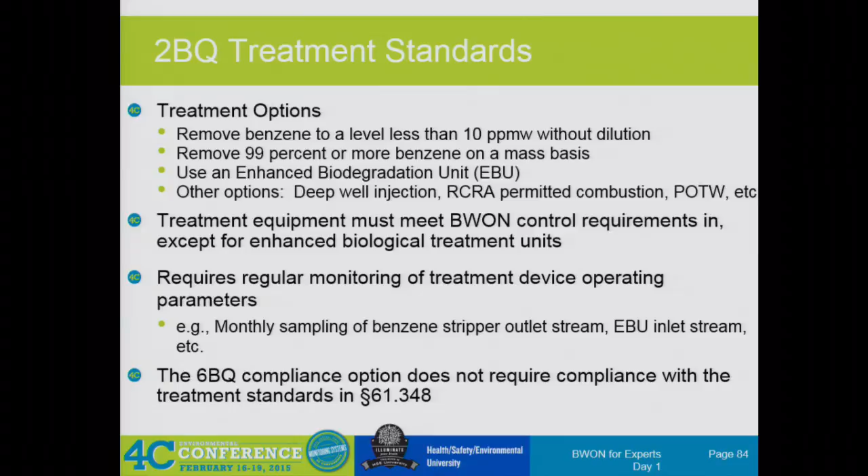And the 6BQ does not require compliance with treatment standards. The only place where 6BQ facilities point back to treatment standards is their first uncontrolled waste management unit, which is the place you count for your BQ. If your first uncontrolled waste management unit is an EBU and the concentration entering that EBU is less than 10, then you don't even have to count that stream. So that's the only time that 6BQ facilities reference back.

No, it's actually right here. Activated sludge. So what is an EBU? So it's an activated sludge process. Uses a suspended growth process that generates biomass, uses actually recycled biomass, and periodically removes the biomass from the process. So that's the definition in the rule.

If the inlet stream, and this is for both 2BQ and 6BQ, if the inlet stream to the EBU is less than 10 ppm, then it's an allowable treatment process for 2BQ facilities. And again, as a 6BQ facility, if it's your first uncontrolled waste management unit and you're less than 10 ppm, then you don't have to count that either.

So the rule has typical operating parameters listed. That's your food to microorganism ratio, MLSS, and residence time. This is what your bio units basically have to be designed to meet in order for it to be an EBU under BWON. Now, do you have to monitor these parameters on a regular basis? Anyone? No. There is no requirement in the rule to actually monitor, but if you have documentation that your system is designed to meet these, it's fine.

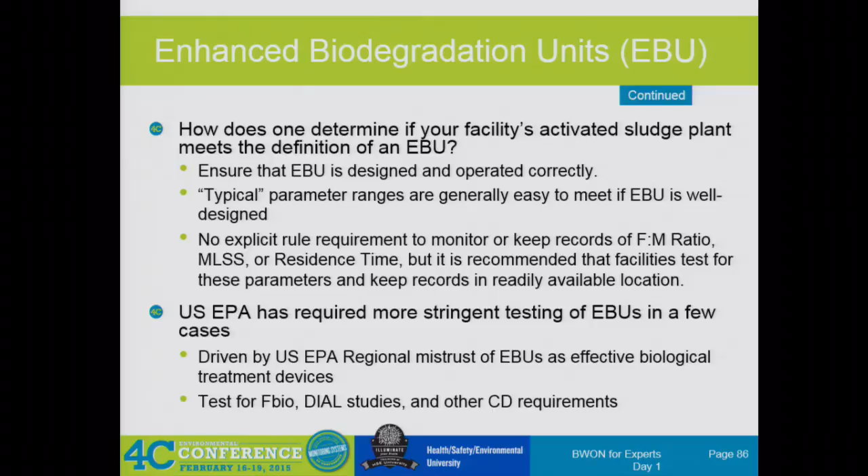Ooh, that's really up there. So treatment standards in the 6BQ. So it doesn't require compliance with 348. There's no reference to 348 under 342E. So given that this is kind of the path for 6BQ facilities back to treatment standards under the EBU. So 342E presents the 6BQ as an alternative to C. And C does not apply to wastewater streams at 6BQ facilities. So therefore, it doesn't go back to 348. It's kind of a big circle. I've had to do this several times to prove to people.

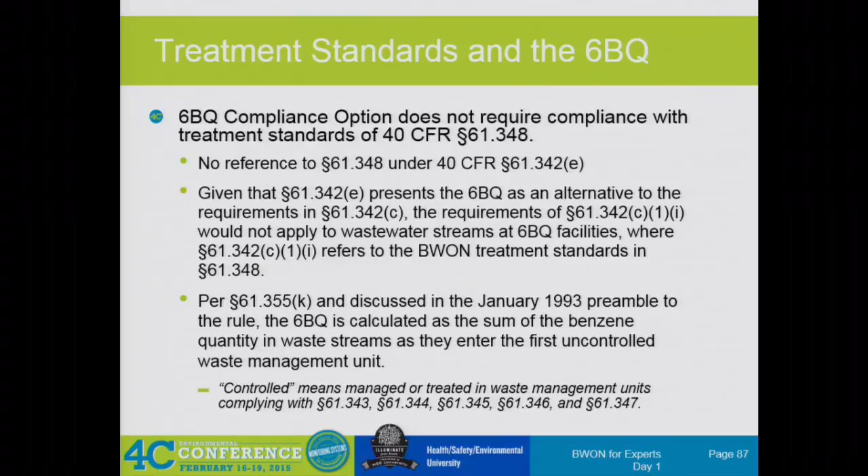So per 355K, and it's also in the preamble as well, the 6BQ is calculated as the sum of benzene quantity in waste streams as they enter the first uncontrolled waste management unit. And again, if that first uncontrolled waste management unit is an EBU and it's less than 10, then that stream does not even have to count toward your uncontrolled 6BQ.

So the other treatment options that were mentioned in that one bullet, so the deep well injection, as long as it is permitted under 270 and complies with 122 under 40 CFR. The use of the hazardous waste incinerators, again, they have to meet the requirements listed. And then industrial furnace boiler, we see a lot of these things used as well, injection of the waste stream.

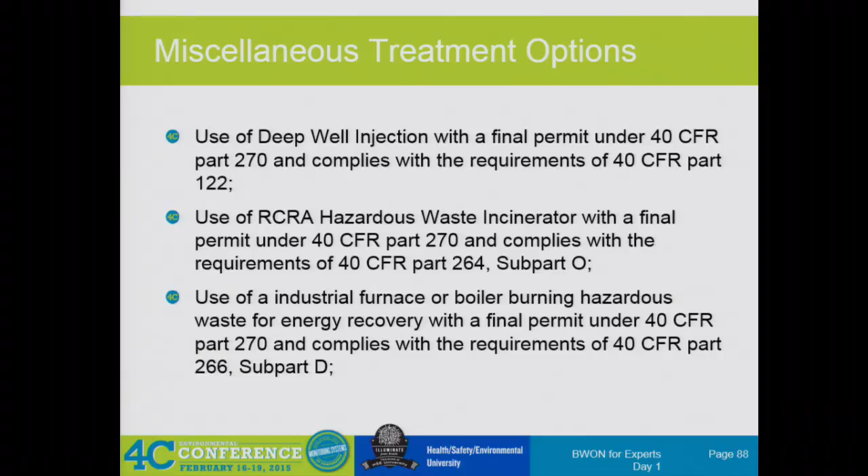The waste stream is treated in accordance with the land disposal restriction under 40 CFR 268, and it's designed and operated with a closed vent system to a control device, meeting 349 in the BWON rule. Or it can be treated by means or to a level that meets benzene-specific effluent limitations under the performance standards under 40 CFR parts 401 through 464.

So a lot of this, you don't see a whole lot. I've seen two deep well locations in my time with Sage. I think they don't have near as much to monitor and look after outside of their deep well requirements under their permit.

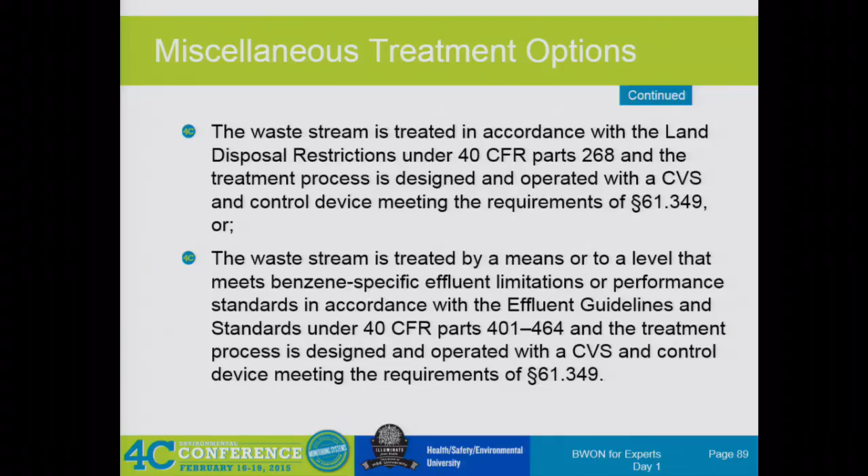So now that you've learned a little bit about treatment standards, what would your 2BQ be? Because the benzene stripper is a treatment device. I'm going to write the answer to the first one up here, the first one that we did earlier, because I like to do the comparison. Not that you'll be able to see it from back there.

All right, so what if your 2BQ facility manages combined wastewater in a controlled wastewater treatment plant en route to an EBU. At one point, maintenance on your DAF forces you to bypass your wastewater through an uncontrolled tank before rerouting it back to the wastewater treatment plant. Is this allowed under 2BQ? And how would it affect a 6BQ facility?

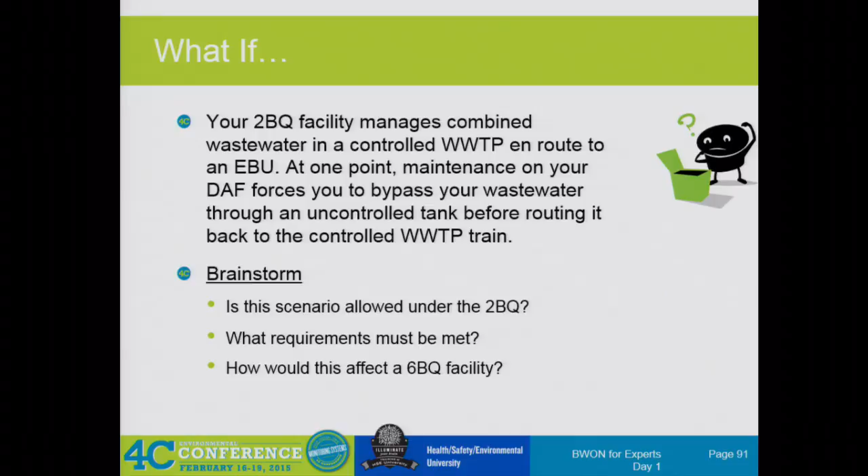This is not a very common scenario, and it's one that even I will typically go back and have to refresh myself on when it comes up. So there's something in the rule only for 2BQ facilities called a 1 megagram exemption for aggregated waste.

So that's pretty much what I just said. But it also has a monthly sampling requirement for that stream, just like it typically would going into an EBU to remain less than 10 ppm. And then again, the total annual benzene quantity in that waste stream, just routing through the uncontrolled waste management unit, cannot exceed over the full year 1 megagram per year. Like I said, it's not very common. It's typically used when you're having to take something in your wastewater treatment plant out of service and you have nothing else to do with it, and you have to route it through an uncontrolled unit.

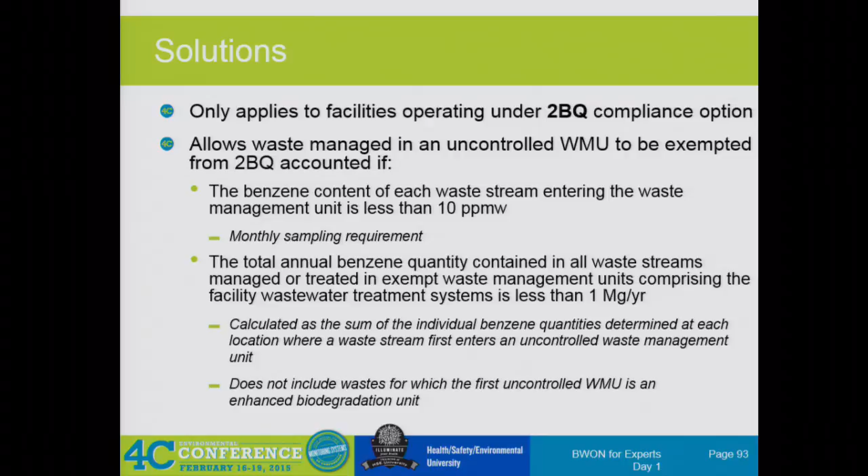So let's say you operate a TSDF, which no one here does, which receives benzene-containing carbon waste from refineries and chem plants, and you manage it in containers prior to feeding it to your calcination process, which reconverts it back into activated carbon.

How is the TAB accounting for a TSDF different than a chem plant and a refinery? Because all we really talked about is how you come up with TAB streams in chem plants and refineries. In this training, we don't really have a lot of TSDF people come. How is it different? And if your TSDF TAB is less than 10, are you still subject to BWON control and treatment requirements? Does anyone here know how a TSDF calculates their TAB, and what it's based on?

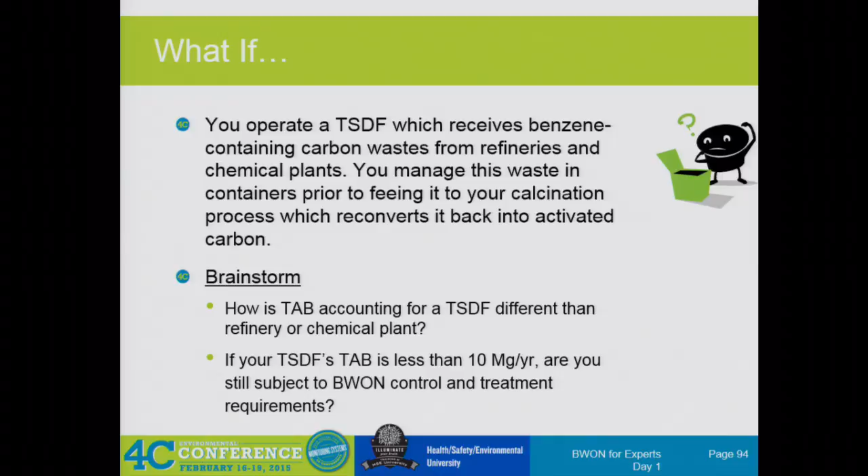All right, so a TSDF calculates their TAB based on the waste it is receiving from refineries. Similar to when a refinery or chem plant is receiving waste from another affected facility for treatment, that is where their TAB starts, when they're bringing it on site. They may be generating other waste on site as well, but the waste that's coming on site is their TAB.

So if a TSDF is less than 10 megagrams a year, that means it's not subject to control and treatment requirements, right? But what if you, as a refinery or chem plant, are sending waste that's required to be controlled to a TSDF and they're less than 10 megagrams per year? That means they have to follow control and treatment standards in order to control and treat your waste per the standards, right, as a TSDF.

It's kind of a sticky situation. I believe Ken Gehring, in 4C, maybe in 2012, said TSDFs are kind of a sticking point. They haven't gotten a lot of scrutiny from the agency, it doesn't seem like. But he says he knows very few TSDFs that are over 10 megagrams per year, and most people at TSDFs think they don't have to control anything if they're less than 10 megagrams per year.

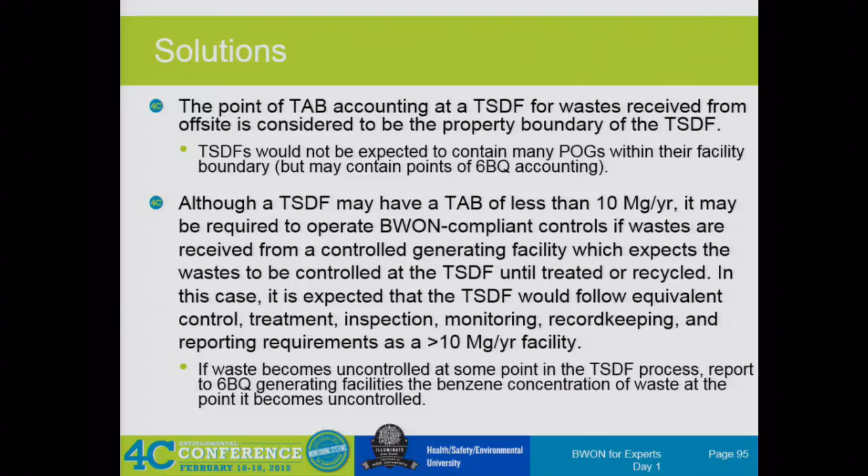We've actually come into this scenario several times with clients, where they try to explain to the TSDF that it has to be controlled, and the TSDF tries to tell them, oh no, it doesn't, because we're not subject since we're not over 10. We have to work around those issues, and they end up sometimes having to send it somewhere else. The facilities may be capable of doing it, but a lot of TSDF facilities, not all of them, do not understand the rule and how it applies to their customers. So it's just something to be aware of. Make sure you call your guys at your TSDF every once in a while and make sure they understand what you guys need from them.

All right, so what if your environmental manager comes to you one day and asks whether you've been inspecting and monitoring, or whether you should be inspecting and monitoring, the various pieces of your sour water system? Again, we talked about this this morning. Feels like yesterday, but we talked about it this morning. What are your thoughts on that? It's all your above ground piping from your units to your sour water system, the actual tanks and components.

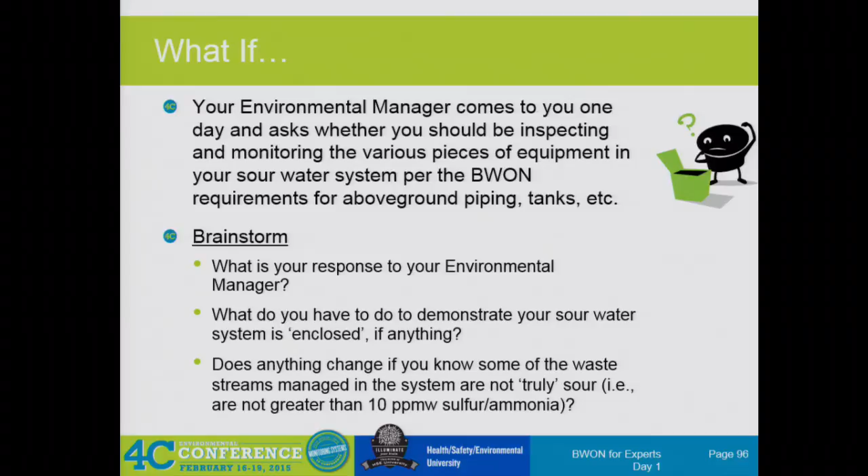If you were to read and go by the ADI that was published, it says new, I guess it's still relatively new per the guidance, then you would go back and include all of those things into your inspection monitoring program.

And in order to demonstrate your sour water system is enclosed, that means all tanks, vessels, flares, whatever is part of that system, and whatever's been, the control device itself also would come into play. Typically somewhere between point A and point B, that involves your refinery flare.

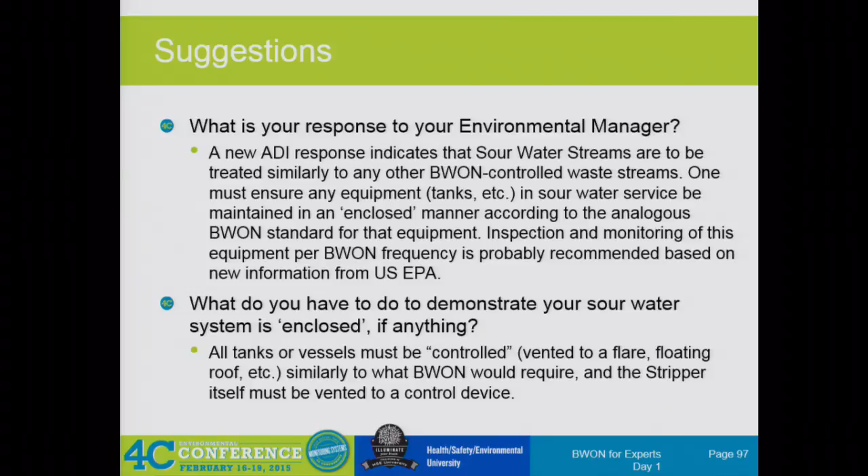So, again, like I said earlier this morning, it's really up to the facilities and the companies to kind of take their stance on how they want to handle that ADI.

Does anything change if you know some of the waste streams in the system are not truly sour? So if you're treating things in your waste streams in your sour water stripper system that are not truly sour, then you pretty much negate the sour water exemption. You have to go back and count all those streams back at point of generation per all the other tab streams.

And then, of course, the sour water stripper itself may be a treatment device now rather than just a waste management unit under the previous scenario when you're taking the exemption.

It brings in a question of facilities that are not over 10 that operate a sour water stripper, that aren't subject to the control and treatment standards and therefore not subject to the inspection and monitoring standards. However, this ADI forces them to do inspection and monitoring anyway.

So, any questions on that? Does everyone know kind of how their facilities landed in terms of including that?

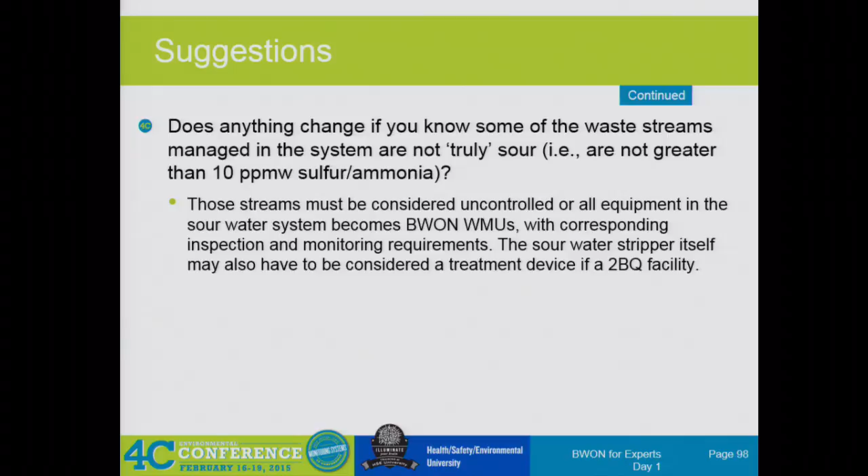This is your Method 21, no detectable emissions monitoring, which is required annually. We'll talk about consent decree requirements later, which are more stringent, more frequent. And we're also talking about only looking at components in vapor service.

So BWON inspection and monitoring has been a recent focus during the EPA audits. Every EPA audit in the past 2-3 years involves the use of an IR camera.

And they're coming out and using that to determine whether there are leaks in systems, if there's vapors coming up from what's supposed to be water sealed or closed drains, conservation vents, things that really you can't see with the naked eye in a quarterly visual inspection. They're coming and hitting facilities up with an IR camera on a lot of their control equipment.

And they found also a lot of deficiencies in terms of inventory and equipment integrity too. So your wastewater treatment plants and facilities, typically not the most up-to-date pieces of equipment in the facility, right? Not a whole lot of money has historically been spent on upgrades to those.

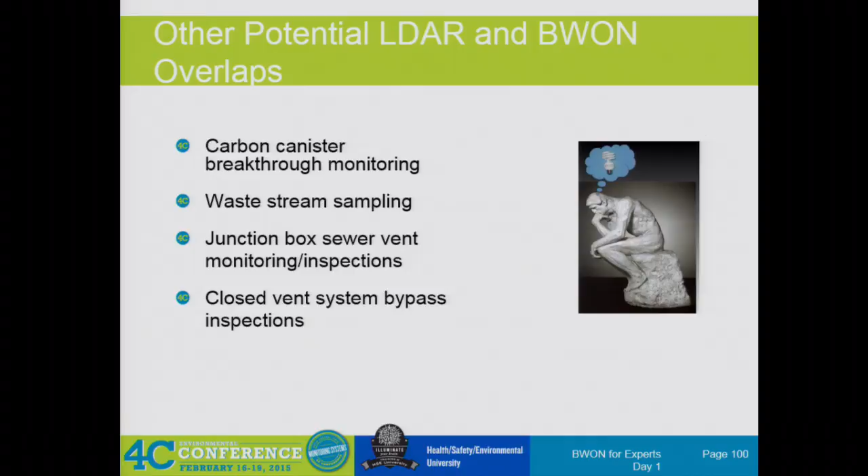Closed vent system bypass inspections. Again, that requires your Method 21 monitoring. So how do the BWON components compare to LDAR components?

Well, they don't define them the same. So BWON doesn't name a valve, a flange, a pump. It's basically any potential leak interfaces. So if you're looking at a tank, you have manways, you have valves, you have flanges, all of those things, hatches, latches around the, what do you call those little things? They have those explosion-proof lids.

Every seam around a controlled waste management unit is a potential leak interface, and therefore all of those things have to be inspected. I had a client recently who's been going back and forth with the agency because they have DAFs, just your regular open top DAF, but they installed covers years ago to control their DAFs, and their very complicated dome system has kind of like a honeycomb design.

They had to go in and add, and there's hundreds of them, every seam on the top of that DAF cover to their inspection and monitoring program. So not just your big seams and your big connectors, every seam on that DAF roof had to be inspected via Method 21. Oh, and it's an oil water separator too under BWON, so that's quarterly monitoring rather than just annual. So it brings any potential leak interfaces in the vapor space to the LDAR program.

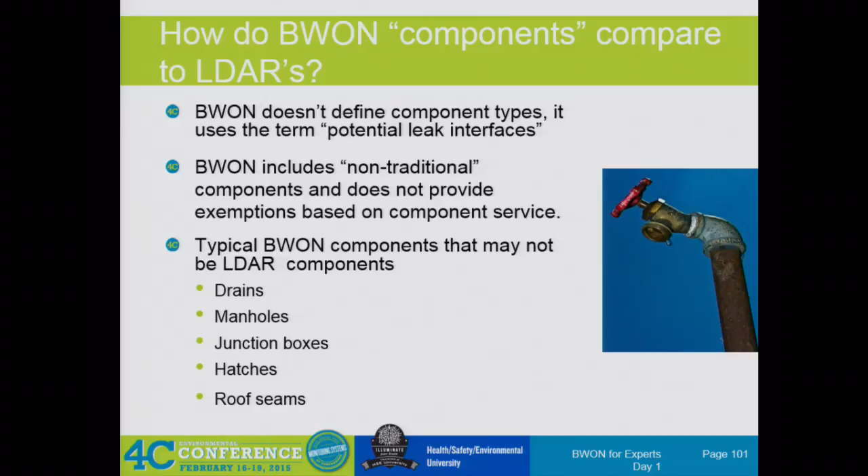So again, a lot of non-traditional components that you wouldn't look at or tag in an LDAR program. Typical BWON components that may not be LDAR components, so your drains, manholes, junction box hatches, and roof seams. How are the actual requirements different? So NDE, which is in Method 21, is only required annually under BWON, more frequently under consent decree. The annual requirement is only on components in vapor service. Visual requirements are required quarterly on all the affected equipment. And of course you're looking at water seals on drains, which isn't affected by LDAR whatsoever.

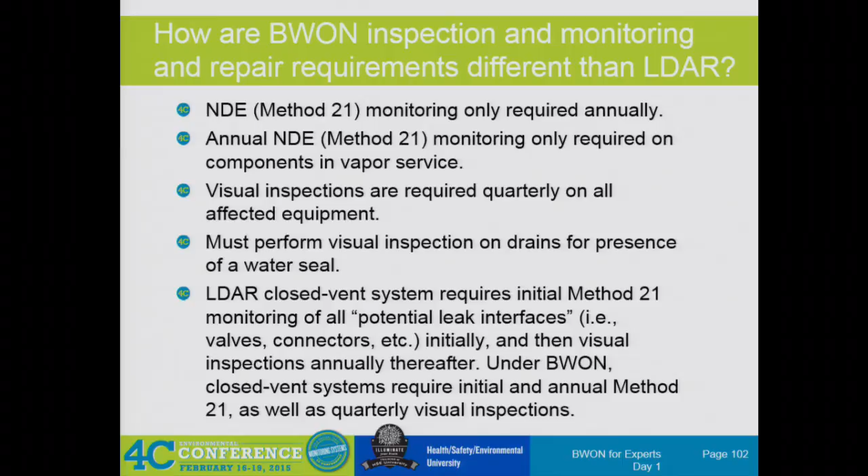LDAR closed vent system requires initial Method 21 monitoring on all potential leak interfaces. So that's just your valves and connectors, right? Initially, and then visual inspections annually thereafter. Under BWON, the CVS requires the initial Method 21 as well as a quarterly visual on top of that. So some of the components may overlap, and the components that overlap are really only your slop oil organic type components, because most of your wastewater streams are not meeting your LDAR threshold for monitoring, right? In terms of HAPs and such.

For inspection, monitoring, and repair, BWON does not have an applicability threshold for VOC or HAP content. This is what I just talked about. Under BWON, the repair schedule is generally only stated for first attempts, whereas LDAR has a specific first and final attempt mentioned.

BWON consent decrees typically increase the monitoring frequency. So water seal inspections go to monthly, usually under consent decrees. Your wastewater treatment plant, oil water separator, Method 21s are typically quarterly under consent decrees. On this whole repair schedule, let's see, do I get to it?

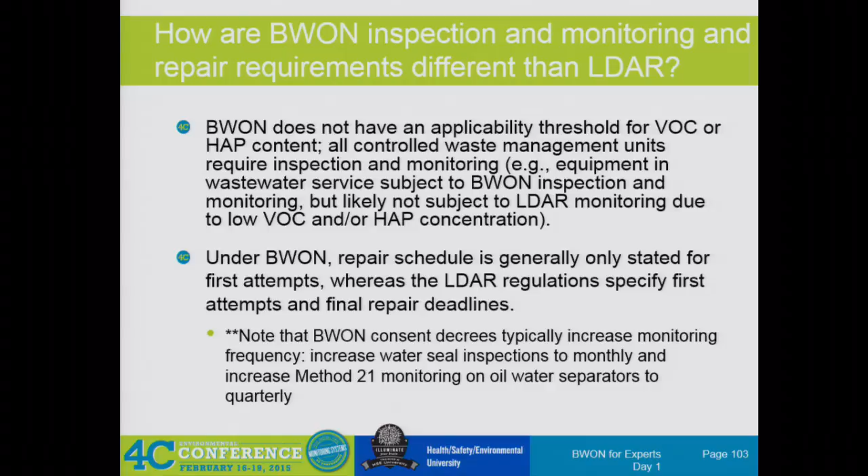What is considered a leak under BWON? So the leak threshold, again, for Method 21 is 500 ppm for all of the leak interfaces. And again, it's no detectable emissions, NDE. It's different than the LDAR term, no detectable emissions. Visual inspections are focused on tight seals, sealed and latched hatches, covers, presence of cracks and gaps, water seals, and well-maintained gaskets. So if you see a crack in a tank on your visual inspection, or a crack in, say, a concrete junction box, that's a failed QVI inspection, and it has to be repaired.

You cannot bring your LDAR guy and say, wait, it's not really a leak because it's not over 500 ppm, because it's still a failed QVI and has to be repaired, caulked, sealed. So you're looking for staining, any kind of presence of liquid or condensation and evaporation.

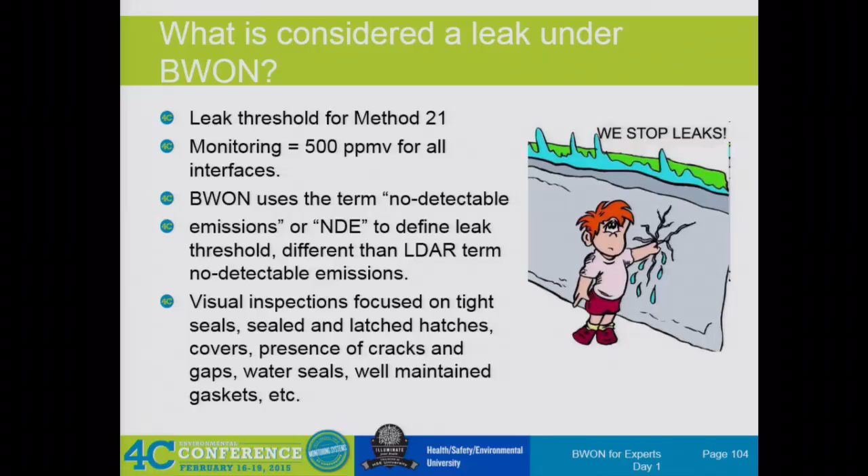So we actually just touched on this a little bit. The use of LDAR databases for tagging and tracking inspection and monitoring is definitely a best management practice. You can associate the actual BWON rule to your components that you have in the BWON program. Again, you can also use the data loggers to manage and upload all of the information. Also document that your repairs were completed in a timely fashion or per the rule. You can also use the data logger for carbon canister monitoring.

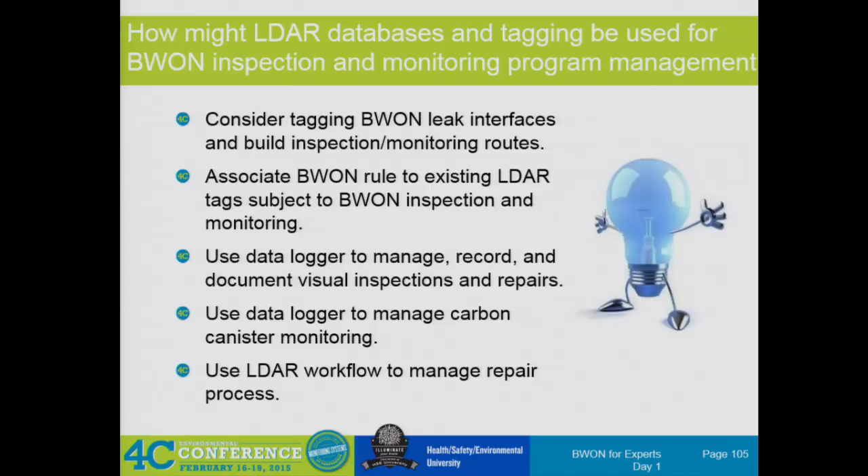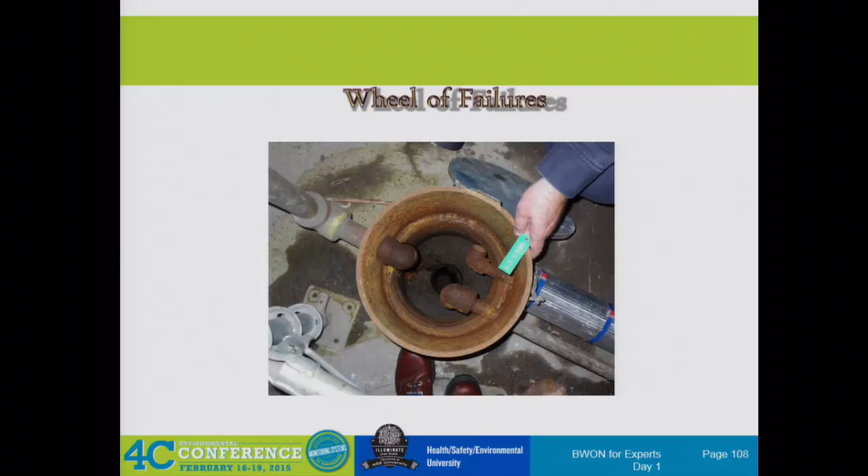I think a lot of these pictures we got from Ken, didn't we, Claire? So Ken Gearing actually provided us pictures from some of his facility inspections that he did over the years. So here is a drain that is supposed to have a water seal on it. It has the BWON tag, and obviously there is no presence of water there in that drain. So this would be a failed inspection. I'm sorry, I keep getting really close to you. Be a failed inspection under your quarterly visuals.

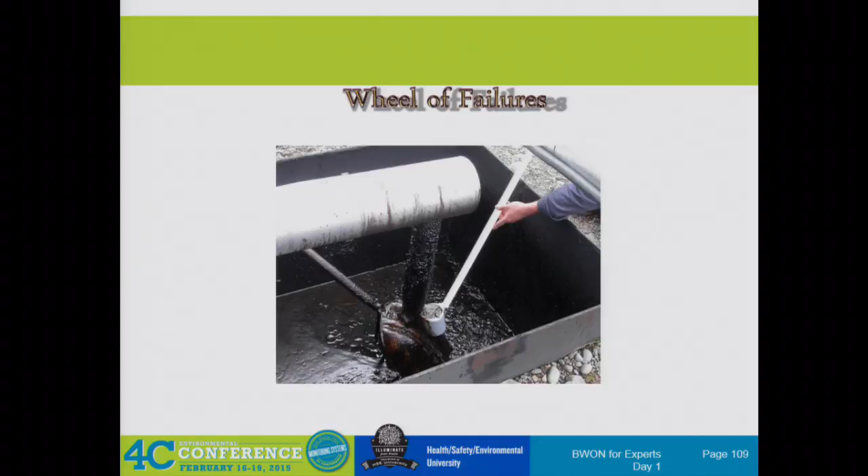Debris, dirt in water seals or in P-traps also does not suffice as proper water seal control. A lot of operators, if they're responsible for doing your drain inspections and they see it packed full of dirt, I've heard it and I've seen it, they think, well, it's definitely sealed, it's plugged, and they think that that's okay. The rule calls for a water seal, no other kind of seal in that P-trap. And also oil floating on the top of the water is also not a proper water seal.

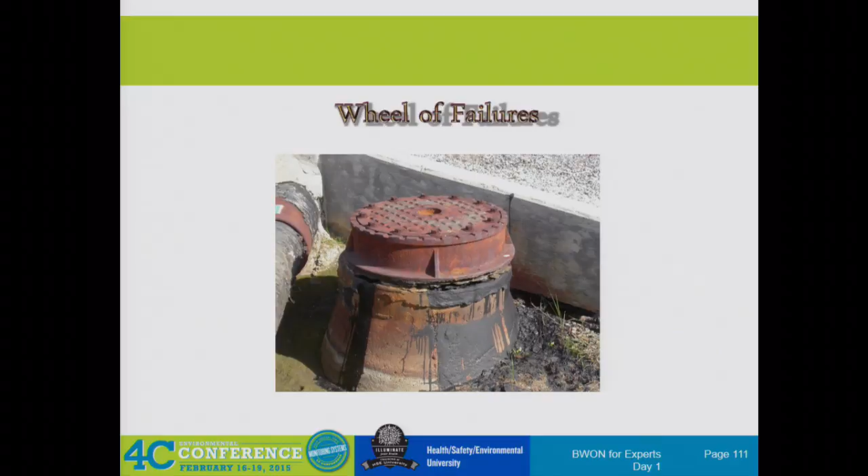Plugged, so the plug has to be rubberized plug? Oh, so when you're talking about plug, yes. Yeah, so I mean, the dirt. So you say the dirt is a plug? No. The rubber is a plug? No. I don't know how impervious the dirt is as opposed to rubber. Just because that's probably the argument.

Right. Actually see this a lot around oil water separators, lids and latches, a lot of staining, a lot of wetness around seams where there looks like obvious overflow and frequent overflow in these systems. So more than likely, if there is liquid coming out of a leak interface, you can assume that there would be vapors coming out of there as well.

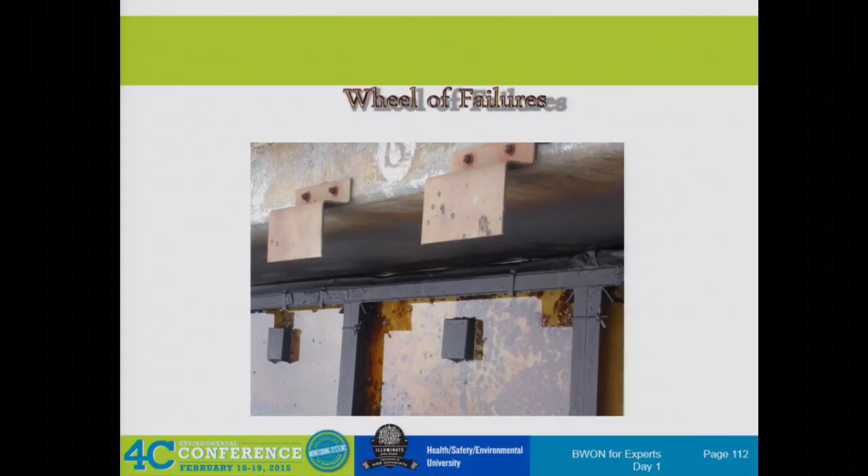So a controlled drain up underneath this blanket, however, we're guessing that it's probably not very controlled if they're actually having to put a blanket on it to keep vapors down. They do this a lot with hot work in areas too, as well, to prevent vapors from flashing up out of the sewer when hot work is going on in a facility.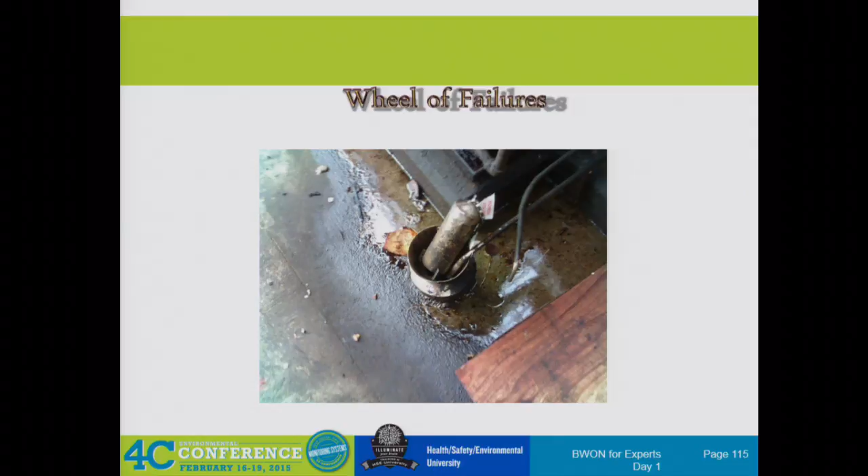This is an example of one of those drain inserts that we were talking about earlier. This one is obviously not in place as it's supposed to be, and that happens a lot with the inserts. Operations, they'll need a quick drain to drain a piece of equipment, and they'll tube up some tubing into that and remove the insert and not put it back into place. So that would be a failure as well.

So, did you want to take a short break? Because it's not break time yet, right? But we are way ahead of schedule, so. I'm explaining everything too well.

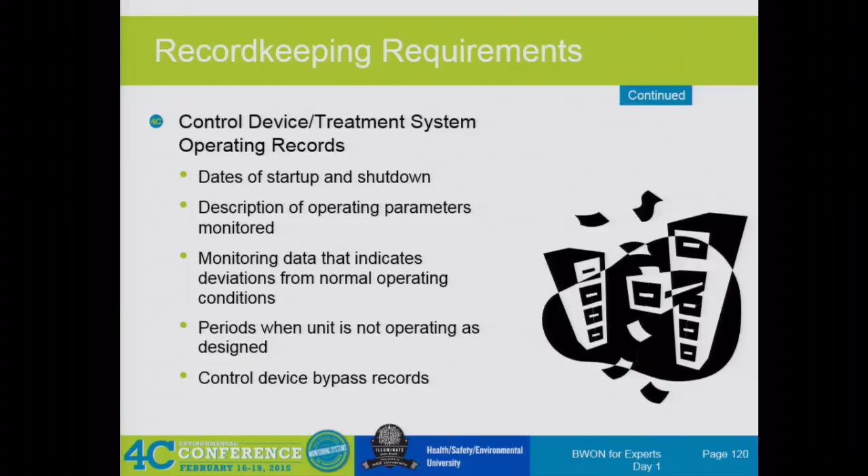Okay. You need your operating records, so you need dates that you started up, shut down, a description of the parameters that you monitor while you are operating. So any monitoring data that indicates, that didn't sound good. I know, really. Any data that, if you have deviations from normal operating conditions, periods when the unit is not operating as designed, anytime you bypass the control device. So not operating when designed, this could be your temperature, your residence time, anything like that is outside of the design basis.

So for each closed vent system and control device, facilities are required to demonstrate compliance, and you can do that 2 ways. You can use engineering calculations or a performance test. And all control devices have to have a statement that's signed and dated by the owner or operator, certifying that that closed vent system and control device is designed to adequately control that waste management unit when it is being vented at the highest load that's expected to occur. So you need documentation signed that your control device does actually control and works and has a design basis.

So if engineering calculations are used to determine the control device performance, facilities are required to maintain design documentation, and this could be any type of specific specifications that you have, drawings, schematics, P&IDs.

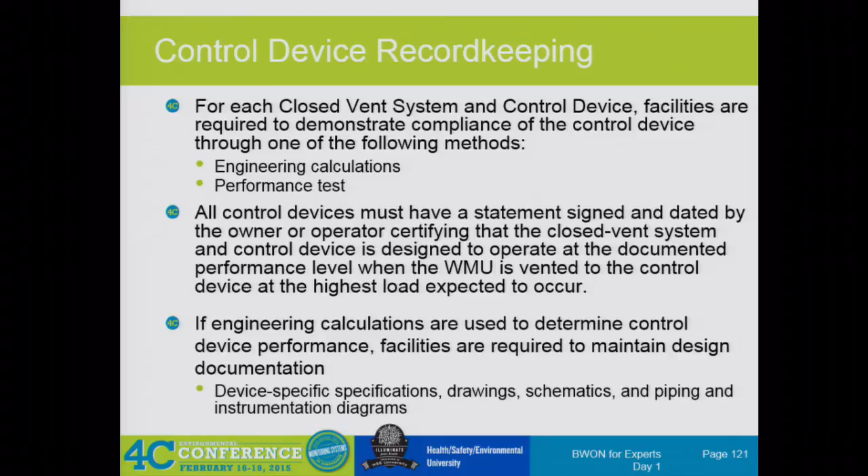Okay, so now we're going to go into different control devices. A lot of these have kind of the same general things you need to have in your documentation. We have thermal vapor incinerators, kind of like a thermal oxidizer, catalytic vapor incinerators. With these, basically, you need to know what's going to them. You need to have a composition of your vent stream, the concentrations of those constituents, a flow rate, design minimum and average temperature in the combustion zone, and then a residence time. For this one, if you use some type of catalyst, you need to have just a minimum and average temperature across the catalyst bed for the inlet and outlet.

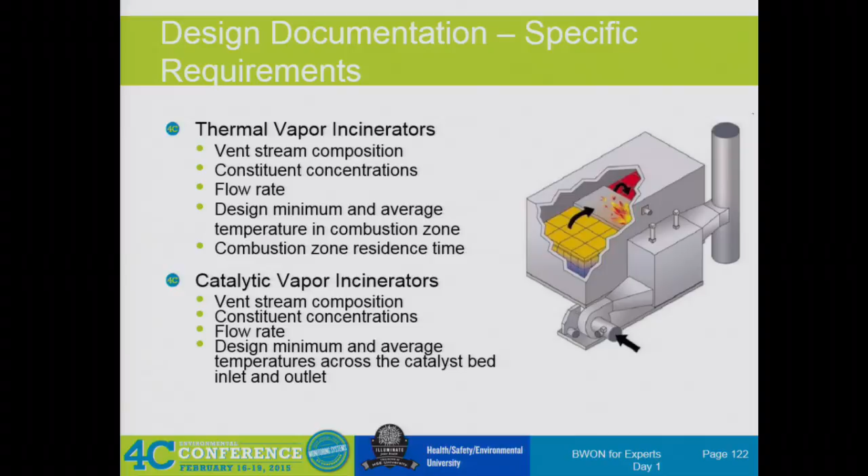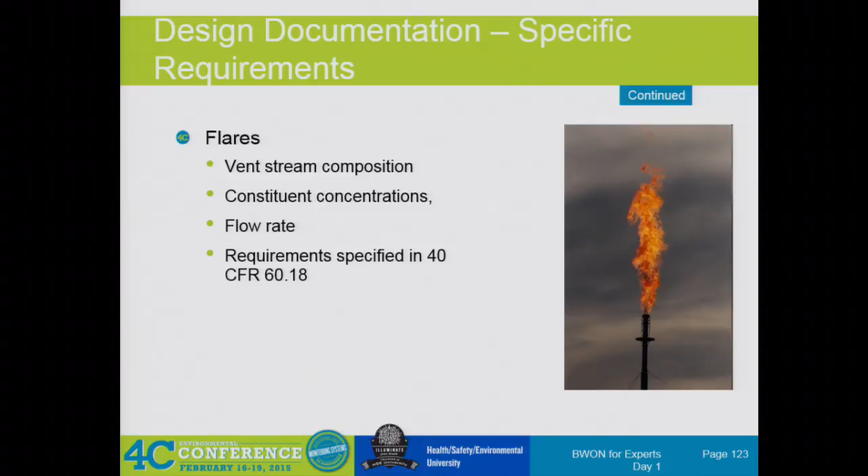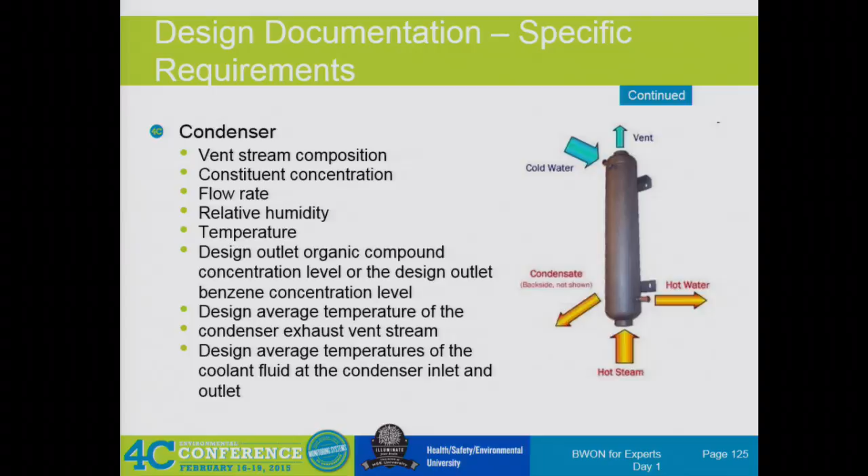A condenser, like all the others, you need to know what's going to it, concentrations, flow rate. With this one, you need to know a humidity, temperature, the design outlet organic compound concentration, and or you can do the benzene concentration instead. Average temperature of the exhaust vent stream, and then average temperatures across the coolant fluid at the inlet and outlet.

So then with carbon, we have 2 types of carbon. We have carbon that can regenerate itself on site, or you have carbon that you ship off-site to a vendor, like Siemens, Calgon, someone. So if you have carbon that regenerates itself on site, along with the first 5 that are pretty standard, you need to have your vent stream organic compound concentration and/or benzene. You can do VOCs or benzene.

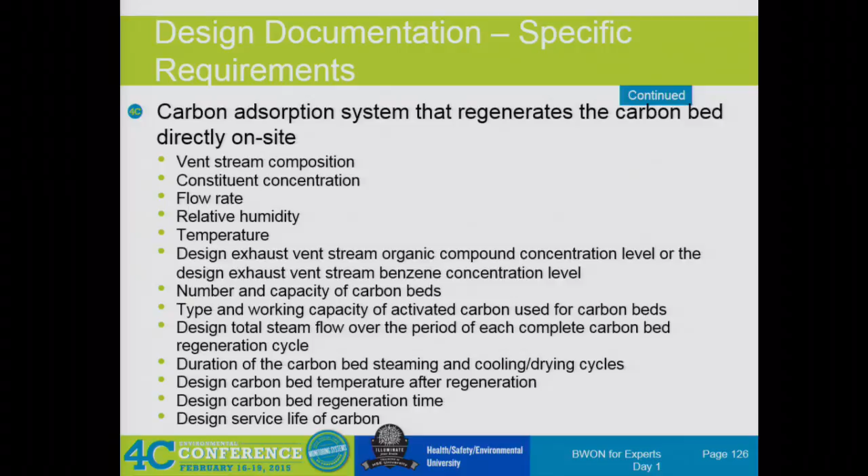Number and capacity of carbon beds. How many beds do you need? The number, how did you get to that, the design basis. Type and working capacity of activated carbon. And then you need to know stuff about how long it takes to regenerate. Duration of the carbon bed steaming, cooling and drying cycles. Temperature after regeneration, how long does it take to regenerate, and then the service life of the carbon.

So carbon that does not regenerate on site, that you have to take off, you need to know all of that, and then you need to know what your design carbon replacement interval is. And this is done through engineering calculations or design documentation, design basis, performance testing. So if you update those, do you have to keep old records also? No. Just as long as you have them current? As long as they're reflective of current operations in that system.

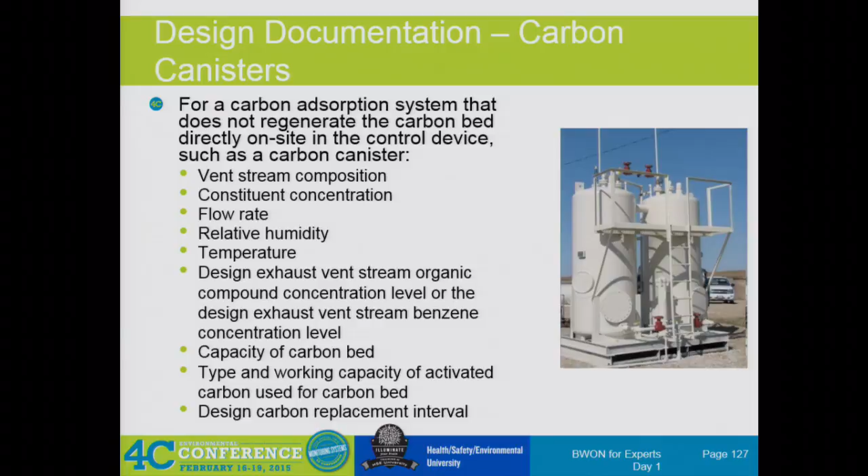Okay, so annual report. Everyone must submit an annual report if you're greater than 1 megagram per year. It's typically submitted on April 7th for the previous calendar year. April 7th is kind of a random date, but the rule was first promulgated, I think it was January 7th, so they gave you 90 days. So that's where the April 7th came from.

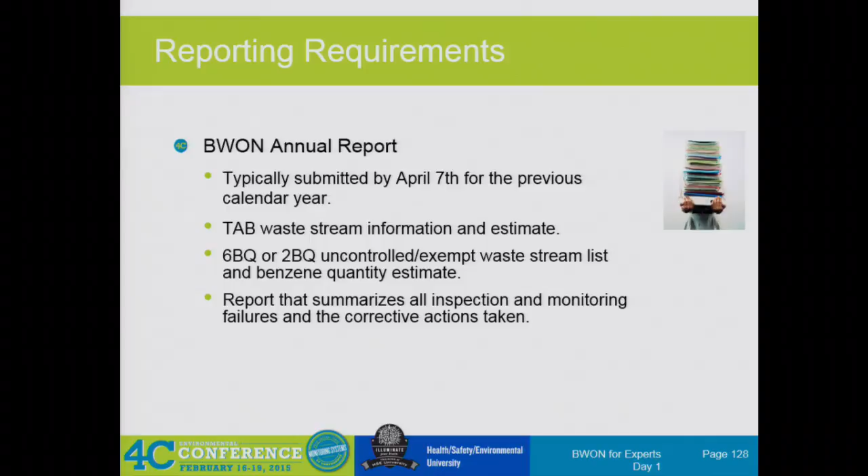Within that annual report, you have to have your TAB waste stream information and estimate, and that was back a few slides ago. We went through the average, the minimum, maximum benzene concentration, flow rates, oil water fraction, things like that. And then a report that summarizes all inspection and monitoring failures and the corrective actions that were taken. If you have to submit quarterly reports, they're normally submitted on a calendar quarterly basis within 30 days of the previous quarter.

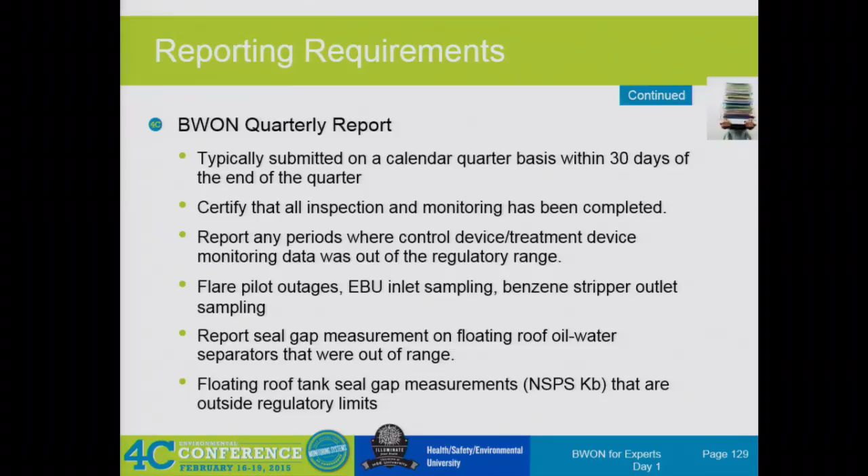Within these reports, you have to certify that all inspection and monitoring was completed. And then you report any periods where, if you're operating a control device, it was outside of the range of how it's supposed to be operating. So if your flare pilot goes out, your EBU sampling is above 10 ppm, the benzene stripper outlet sampling, if you have any seal gaps on your floating roofs of your oily water separators, and then any seal gaps on your tanks. And that's it for record keeping and reporting.

So we're not calling out a category and you guys jumping at the question. You will choose the category, you will get the first chance to answer the question. You get it right, you get the points. And then, yes, a pass is negative if you chose the question. But if you choose not to steal, then you don't get negative points for not wanting to take a chance at it. And no using your binders. Oh yeah, gotta close those notebooks. The first day probably is. Good. Yeah, this is the essentials. So the first day we pretty much go over the essentials Jeopardy. Tomorrow's a little harder, and the next day's probably harder. The questions may or may not necessarily be harder as you go up in point value. It's kind of random.

So yes, we need to start out with team names. Oh, Laura's, I see it churning. What kind of improv name do you have? I was thinking we're the B West, like we're the best. The B1, terrible. No. Okay. What you got, Morgan? I'm fine with that. Okay, we can be that. B West? B West. Kind of like Kanye. Yeah. Oh no. You went there. Sure. Yeah, that's perfect. Do we have to be bees? How does that work? Yeah, the beast. All right, we will go ahead and start with you guys. Who wants to pick? Mary Claire sings the music for us. No, just y'all can take turns.

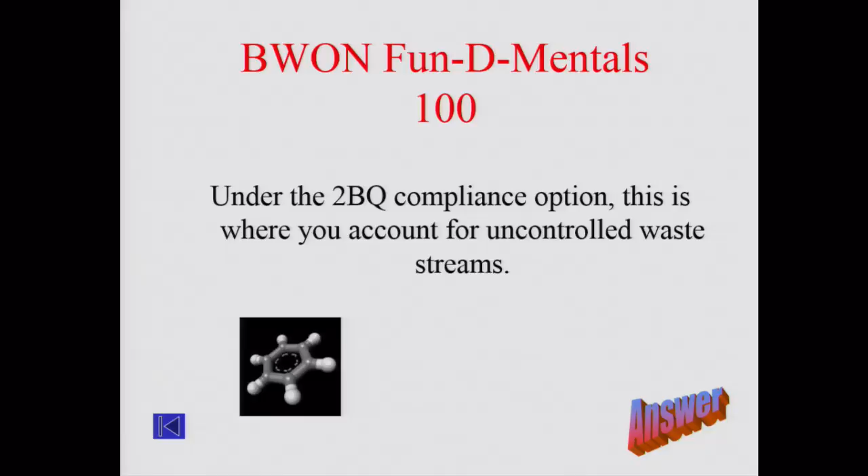For 100. They said the harder questions can be. Under the 2BQ compliance option, this is where you account for uncontrolled waste streams. And you are correct. Nice job. What is the point of generation? All right. How about you guys? Would you like to select a category? BWON record keeping for 100? You guys are not very adventurous. This quantity is used to determine applicability to BWON control and treatment requirements.

So, what is TAB? Is that what you said? That is correct.

See, all of those little picks and stuff help tie it all together. All right. West. I'm not sure I'm going to be able to say that as many times in one day. The West, I don't know.

Let's go with Be One With BWON for 200. These are 2 of the 3 compliance options provided under BWON.

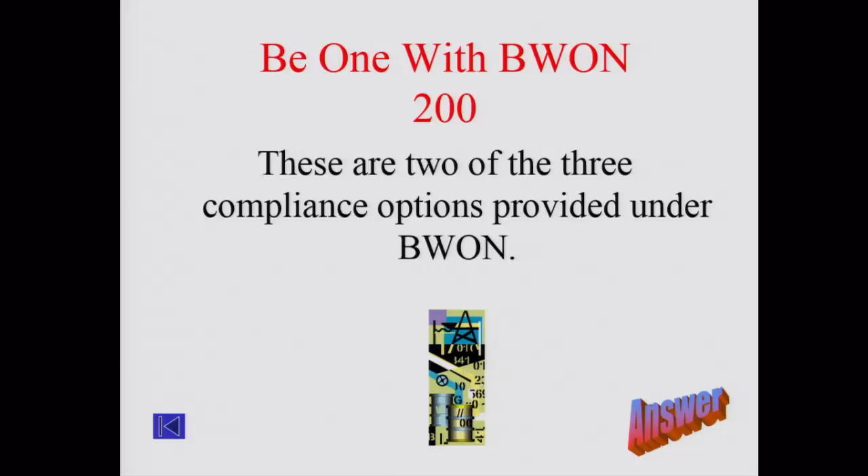What are 2BQ and 6BQ? Yes, you are correct. What's the third one? Anybody? This isn't for points or negative points. Yes, 1 meg, the 1BQ. The one that no one uses. All right, the Beast.

Waste Matters for 500. Slow down. Under the 6BQ option, this is the location where you account for uncontrolled waste streams.

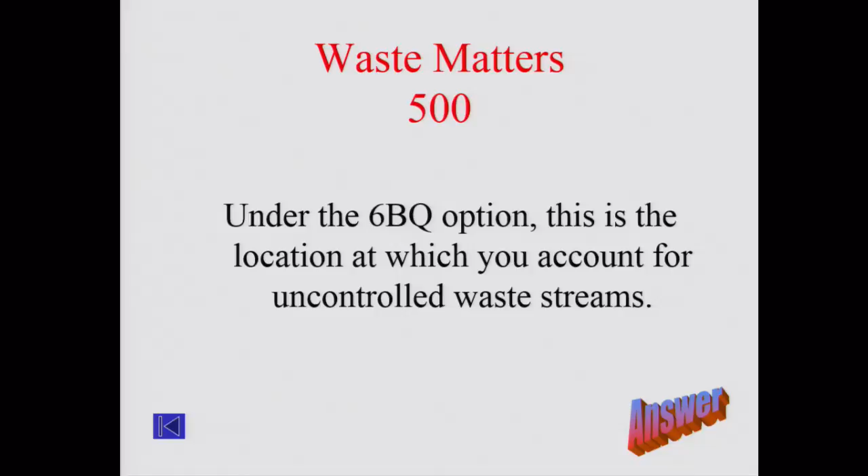What is the exit of the first uncontrolled waste management? No, what is the inlet to the first uncontrolled waste management unit? If you combine the 2 of y'all's answers, y'all got it right. So close. All right.

Let's go with Control Your TAB for 400. Facilities who comply with the 6BQ compliance option, who report a total uncontrolled benzene quantity of greater than this amount, are out of compliance.

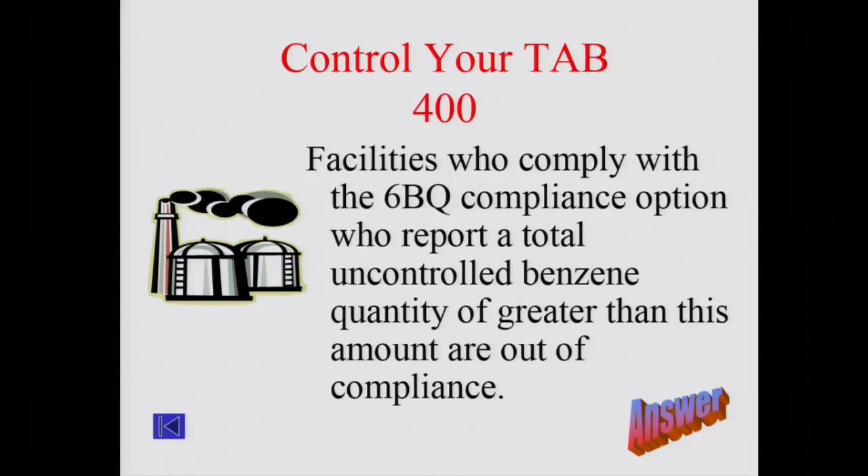What is 6 megagrams? Yes, that was a toughie, wasn't it?

So, BWON record keeping for 300. One method of determining waste quantities requires that you use the maximum quantity of waste generated for this period of time.

It was like our 5th slide or something. Wasn't very far into it. You have to dig deep for this one.

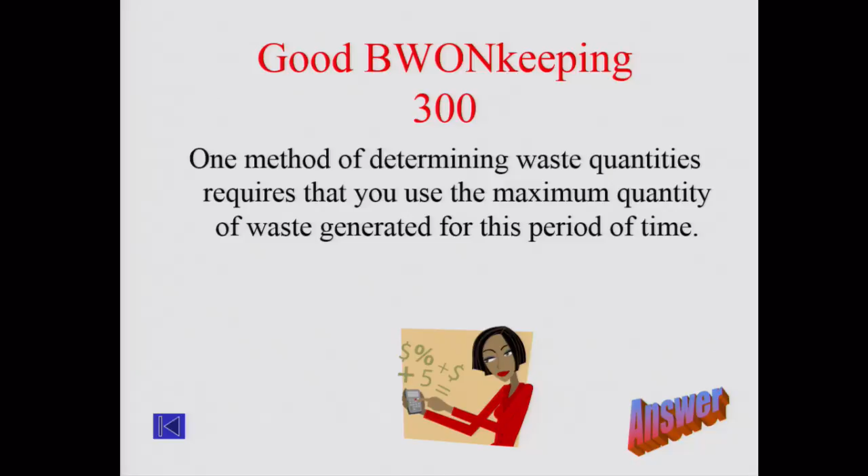What is the 3-year maximum? No. Would you guys like to steal? No, anybody? No, I don't even know. All right, 5 years. The maximum waste generated over the last 5 years.

It was very, very super early in the training. Yeah, that's a different one. Yes. All right. Oh, it's actually listed in the rule that you go with design quantities or the maximum waste generated over a 5-year period. That's for the TAB determination. Yes, that's for your TAB quantification for your waste streams.

Let's go with fundamentals for 500. You may be upset at yourself, this is like one of the hardest ones on here. The definition of enhanced biodegradation unit includes typical operating ranges for these 3 parameters. You don't have to know the ranges, you only have to name the parameters associated with it.

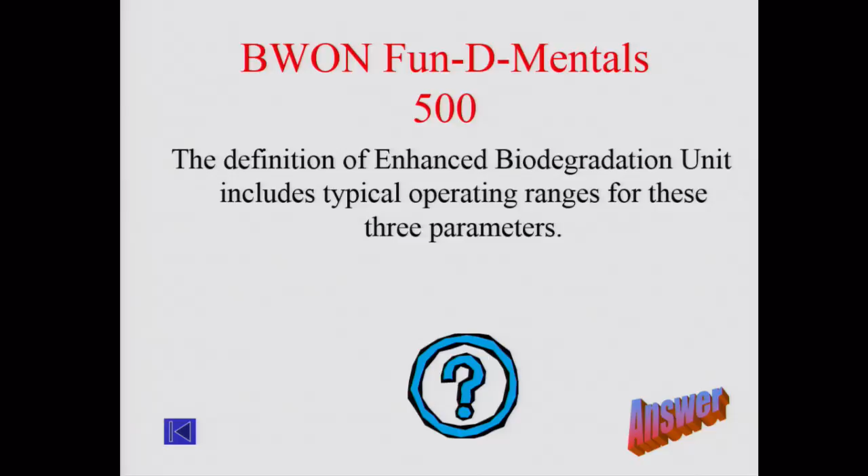What is, yeah, go ahead, you're probably more correct than... What is F to M, the MLSS, and the retention time? Yes. Gold star. It's residence time, but it's the same thing as retention time, so very good.

Oh, you lost connection. No, it's fine. It's back, I just can't touch the table. All right, we're tied up. Wait, I didn't even see.

All right, guys, the beasts. Good BWON keeping for 500. This report must include a summary of all BWON inspection and Method 21 monitoring events resulting in failures, including details regarding each failure.

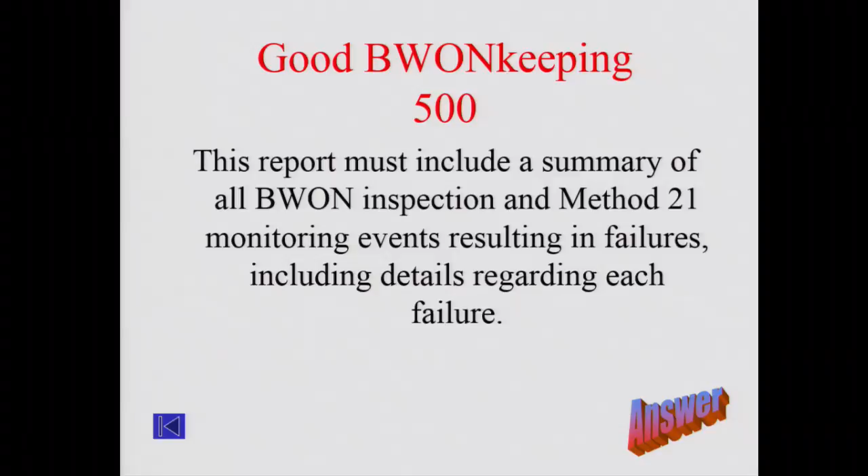Yes, or what is the annual report? That is what the TAB report is. I don't know.

Let's do Be One With BWON for 400. Under the BWON, any junction box requires either a closed vent system to a control device or a vent pipe equipped with this.

Time is running out. Okay, answer. You need an answer? What is a flow indicator? Yes.

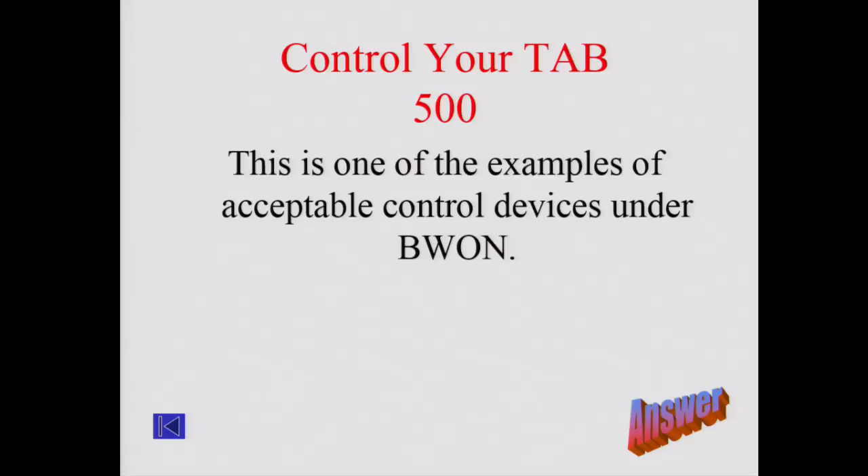What is carbon canister? Yes, that is one. Does anyone want to name any other ones? Flare? Yes, that's a flare. So flares, combustion devices, condensers, all types.

You're back in the black? Nice, just need a bobble over there. Need your time manager to keep up.

BWON fundamentals for 400. Oh, that's a hard one. Under the 2BQ, uncontrolled waste streams that contain less than this are not required to be counted as part of the exempt waste stream list.

Time's up. 10 ppm. Yes, that is correct.

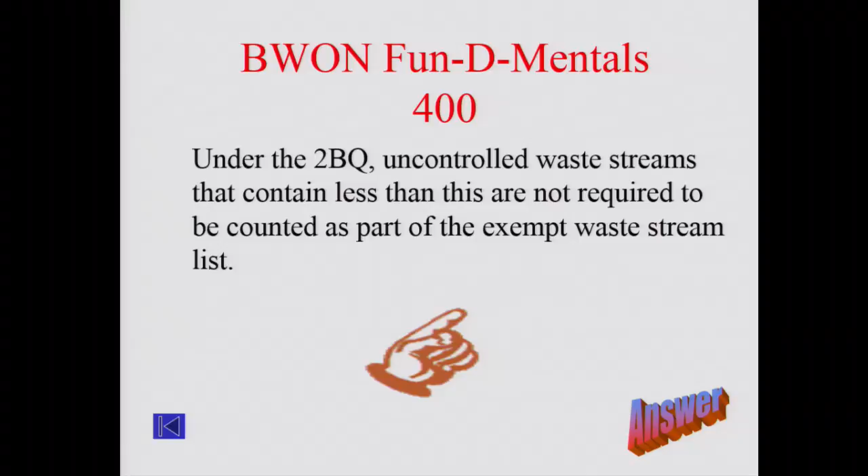We're key, we're the BWON. 500, Be One With BWON for 500. These two reports are required to be sent periodically to the administrator under BWON.

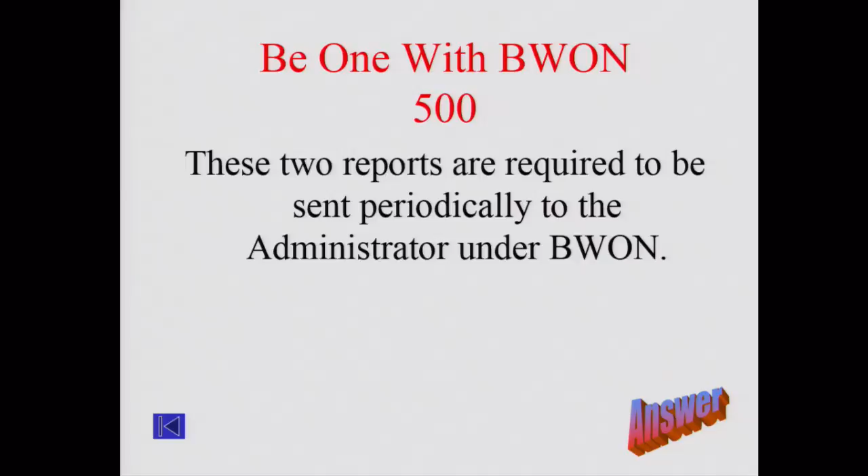What is the TAB and the quarterly report? Yes, the annual TAB report and the quarterly report. Big number, damn, nice job. You're climbing back up, yeah, we went up big numbers.

Let's do Waste Matters for 400. Waste that are fed back to this are considered to be recycled under BWON.

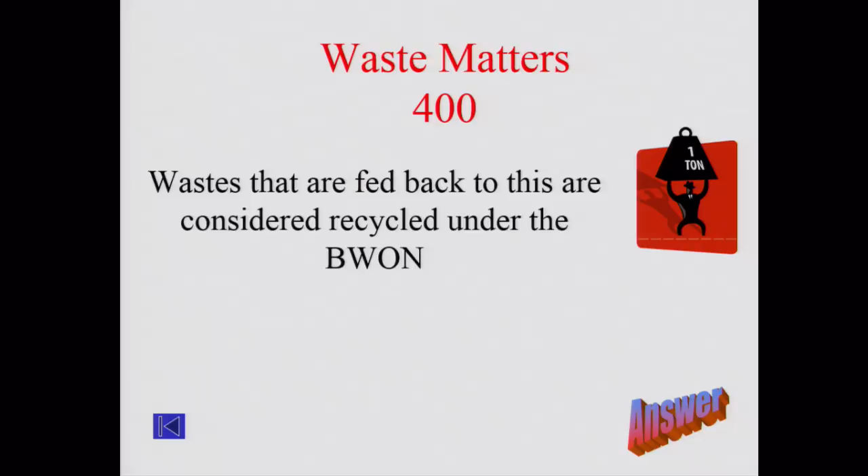Next, you want the other 400? All right, you got to catch up. It is a requirement to monitor parameters associated with the performance of these devices, such as combustion zone temperature for a thermal oxidizer. What are these?

What is our BWON control device? Yes.

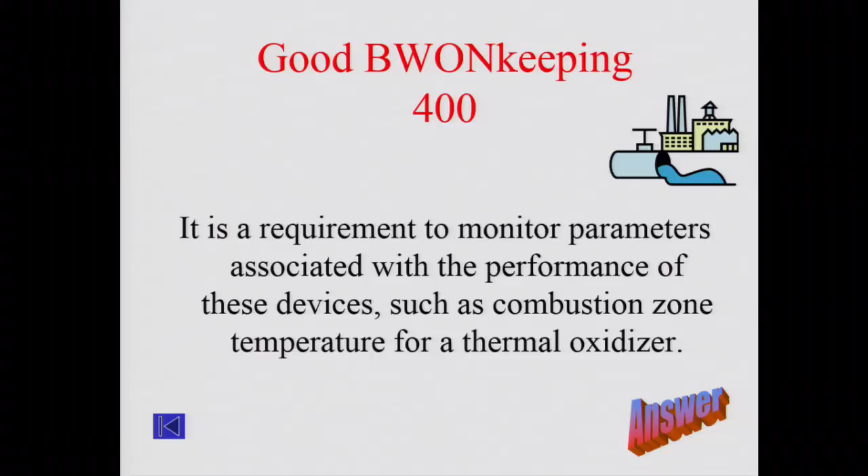Let's do Control Your Tab for 300. This is one piece of information required to be considered by the carbon canister design analysis per 61.356(f)(2)(i)(G).

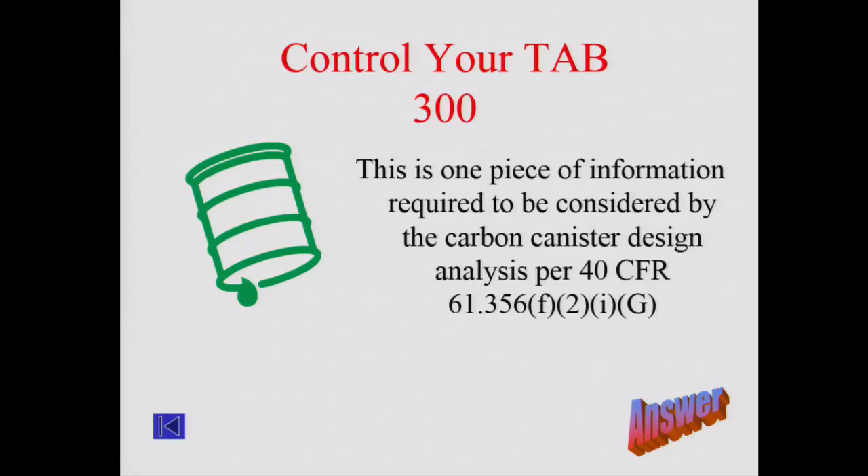What is relative humidity? Yes, that is one of the very, very many buried in there somewhere. It's on the first one on the second line.

All right, next up, BWON for 300. These types of waste should be counted toward a facility's 6BQ.

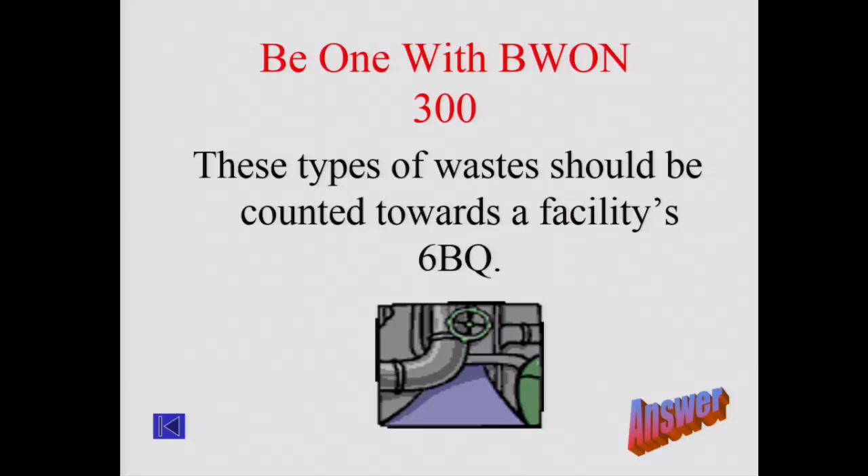Anyone? Time is running out. Yes, uncontrolled waste. It sounded too easy, didn't it?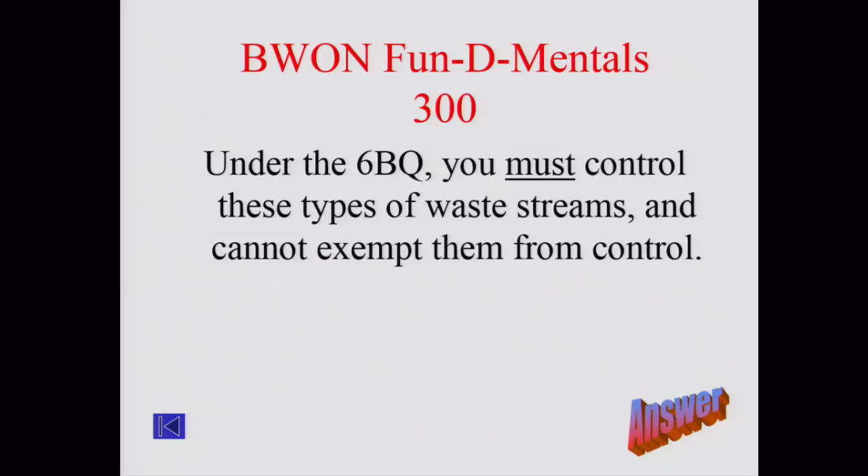Waste less than 10% water. Yes, organic waste or waste less than 10% water.

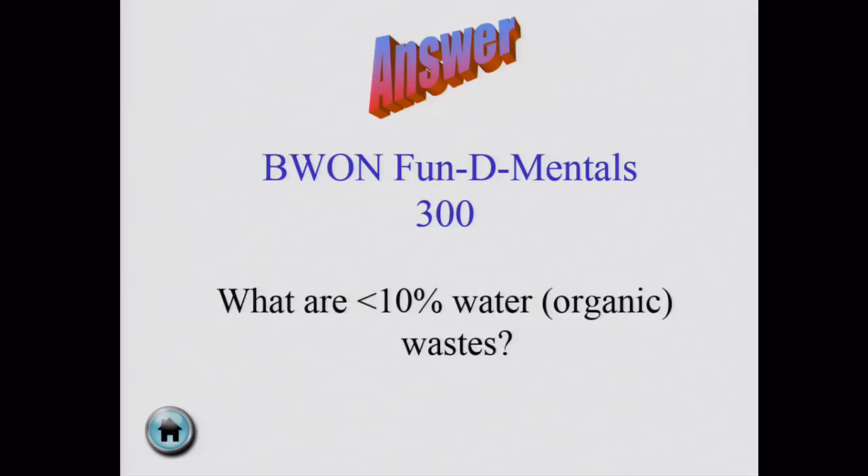I said it's there was an inflection. I just didn't hear it. There was an inflection of the question, which in many cultures is... Oh no, but yeah, I can't give it to you. I can't give it to him. No, but I can't let you guys steal either now that I've.

Waste Matters for 300, wrong screen. There we go. This type of waste, these types of wastes, are allowed to be averaged in the TAB calculation, but not the 2BQ or 6BQ.

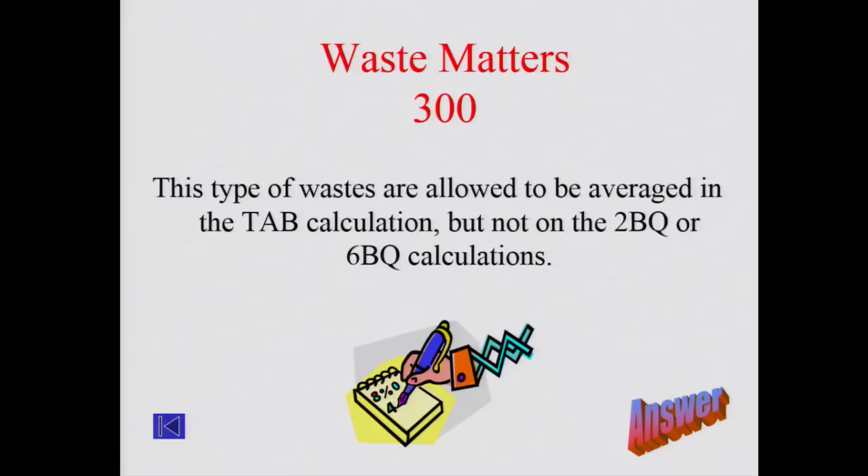What are turnaround wastes? Yes. Getting close.

Six of them? Let's go with Control Your TAB for 200. These are two examples of controls available for tanks under BWON.

Two examples. There may be more than two. Need two.

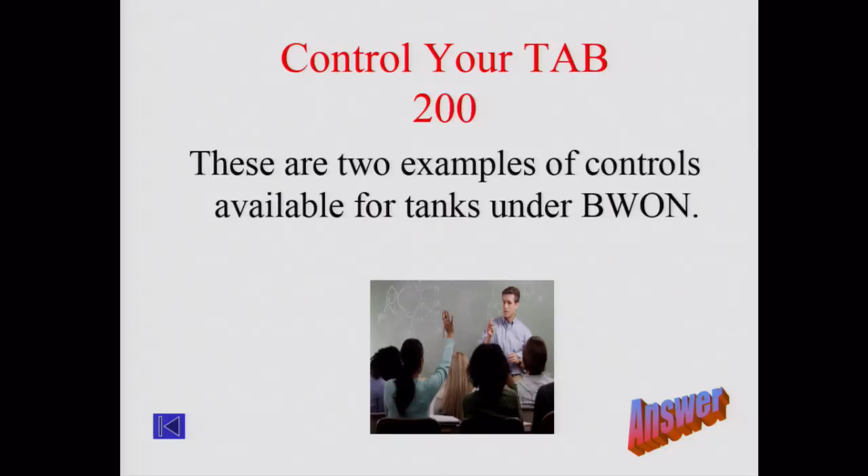Time is running out. Okay, what are a fixed roof venting to the flare, that's the first one, and the second one is an internal floating roof? Yes, doesn't have to be a flare, but yes. Yeah, yes, that's great.

It's one of the 200. Could be one. Good BWONkeeping. A BWON quarterly report includes a certification that the facility has conducted all of these.

What is inspections and monitoring? Yes, you are correct.

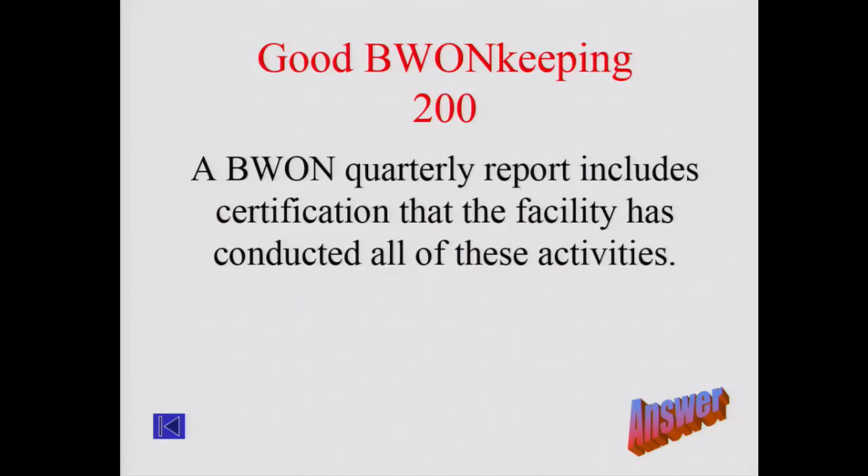Are we ready? Minus 200 whether we pass or answer it wrong. Aw, you gotta try. Yeah, so we should try, but I don't even know what to try. Maybe that is... okay, need an answer.

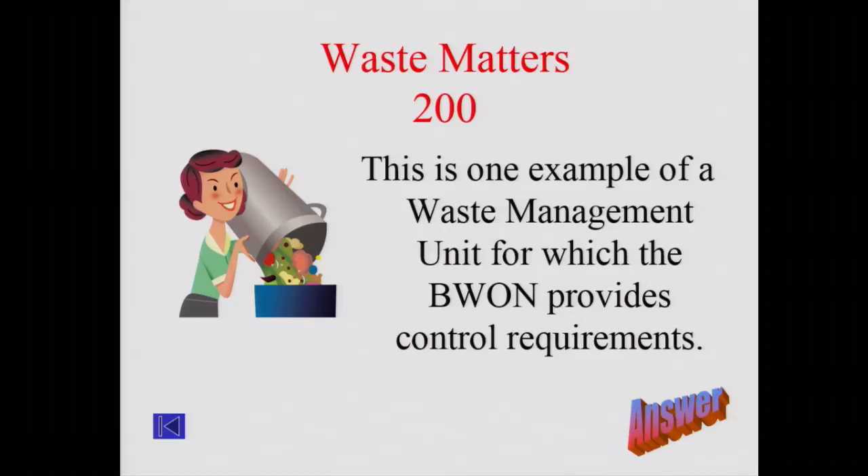Is a separator one? Yeah, the oil water separator is one. The DAF is considered an oil water separator under BWON. Oh. A tank is one. Individual drain systems, containers.

All right, Control Your TAB for 100. You're so funny, divided by 5, if you averaged it over there. This is one of the operations during which it is okay to have open hatches on a BWON controlled container.

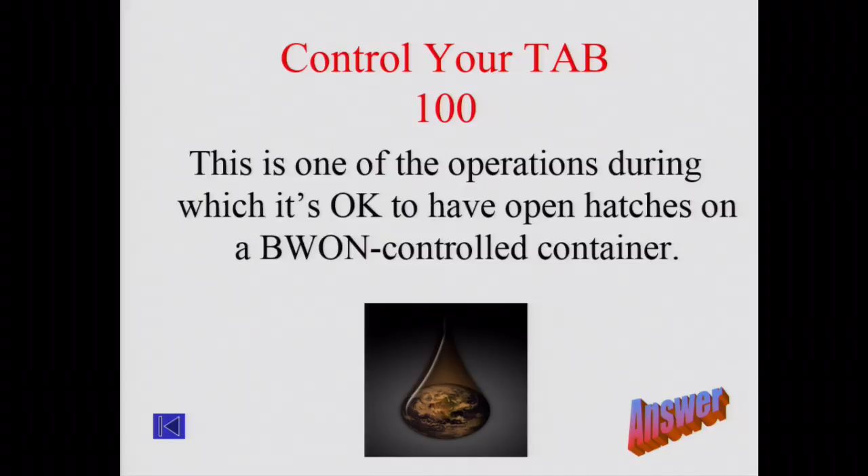All right, what is, when you're adding waste to... yes. So you want to say another one or two? Removing waste, removing waste, sampling. Yes, all of those things.

What is 10 degrees Celsius? That is correct, and you actually did it in Celsius. I never see it in Celsius. That's the only thing I see.

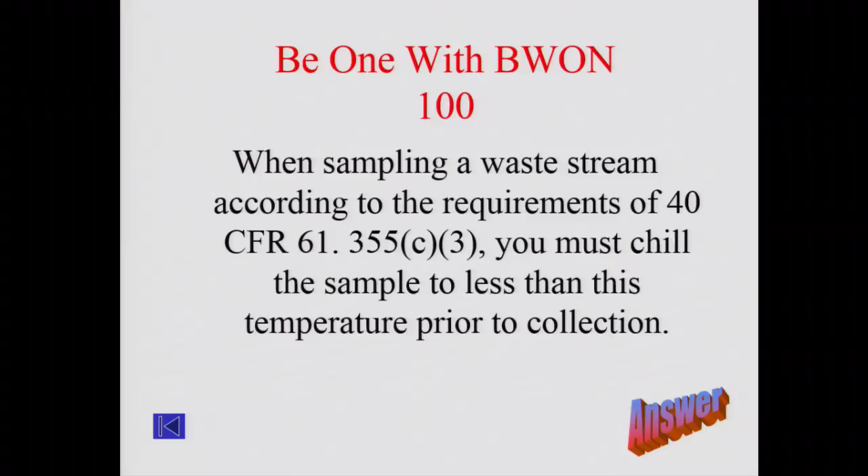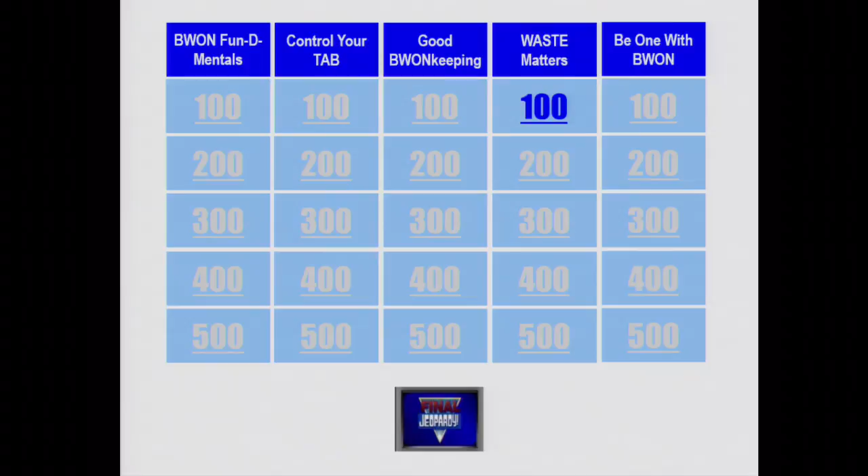All right, Waste Matters, huh? Waste Matters, so it really doesn't because it's 20. Oh yeah, we can't. Oh, but we'll do it anyway.

According to 40 CFR 61.355(b)(1), BWON, this is the tab accounting location for sour water streams. Where is the tab accounting location for sour water streams? What is that?

Is that like a boat?

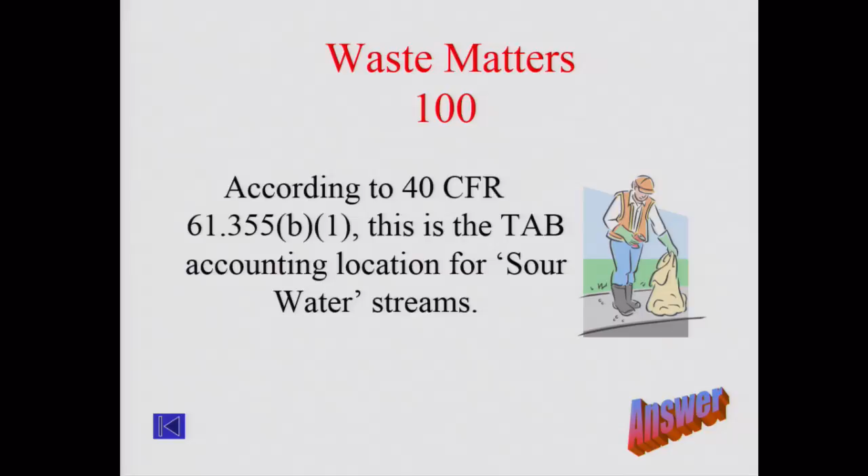Where is the exit? Yes, exit of sour water stream. Nice job.